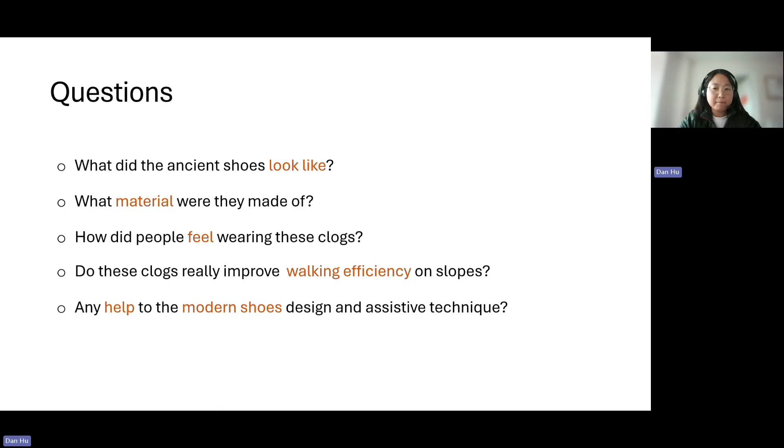Carrying those questions, we designed our research project. We aimed to explore the relevant records of these clogs and reconstruct them. Then we aimed to investigate the physiological and biomechanical effects of wearing Xiegong clogs. Based on those results, we compare the 1-peg and 2-peg Xiegong clogs on uphill and downhill walking. We also want to explore potential applications in shoe design and assistive technology that could enhance walking mobility, safety, and user experience.

So that's how we designed our study. We searched for historic records of clogs dating from AD 385 to AD 433, the period in which Xie Lingyun lived. We found some historic records, then we reconstructed the clogs according to unearthed archaeological finds. Then we used simulation techniques to predict the biomechanical effects on the human body of wearing two different types of clogs.

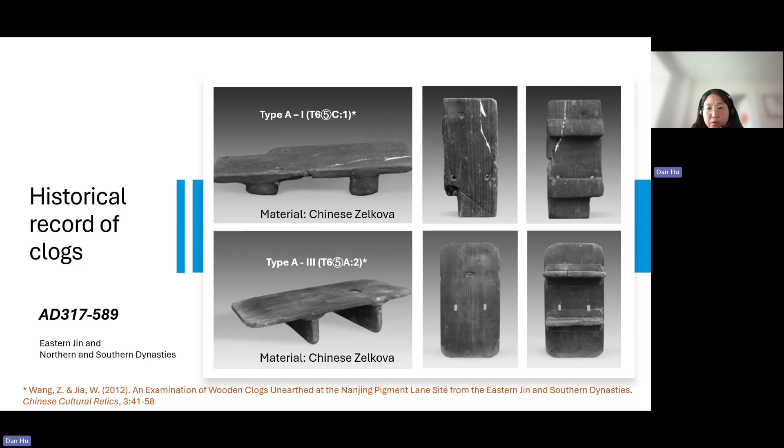If you look at those clogs carefully, you can see there are two pegs under the sole for type A clogs. And there are also 3 holes in the sole. These 3 holes are for the shoelaces or shoe thread to come through and tie the clogs to the foot. Type B clogs are different from type A, as they don't have any pegs. So it's one piece, and you can see there's a hole in the sole for the type B clog.

And for the type B clog, for example, the type BG7 example I chose is also made of Chinese Zelkova wood, the same as type A. But type BG6, the lower one, is made of a different material called Castanopsis wood. This is another type of hardwood, which was commonly seen in southern China, and it has attractive patterns as well. So it was good for making shoes.

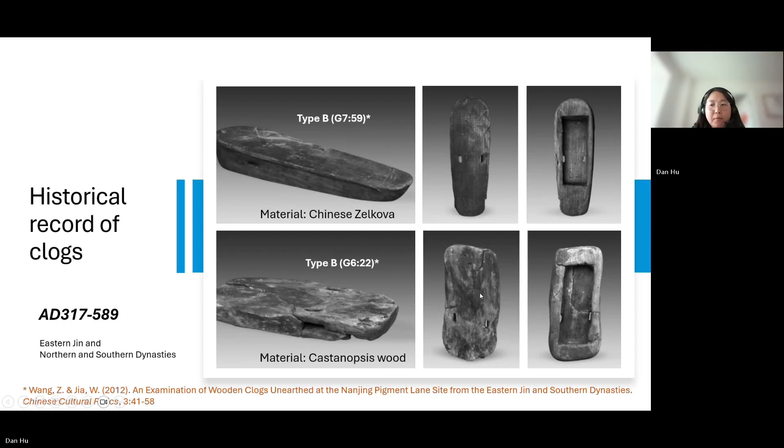You can also see there are 3 holes in those type B clogs, for the shoelaces or thread to come through and tie them to the human's foot. So we selected the type A clogs as our example or benchmark. That is because the type A clogs have 2 pegs, and these pegs are connected to the sole through a so-called tenon joint. So they can be removed if needed.

We found the dimensions of this type A clog from the literature, and we adjusted the size to a US men's size 8 shoe, which I think is equivalent to UK men's size 7. We also did some modification to the clogs. If you see the original unearthed clogs on the left, the distance from the front and back edge to the peg is not symmetric: the front is shorter and the back is longer. But we made them symmetric, so the front edge to the peg equals the back edge to the peg, both 76.

The reason for doing so is we want to create some slope angle when we remove one peg. In this case, the angles will be the same for uphill and downhill, whether we remove the front peg or the back peg. So we manufactured several pairs of these clogs. We used cheap wood. We couldn't afford very high-valued wood like oak, so we only used pine wood. But it worked, although it's not as hard as oak.

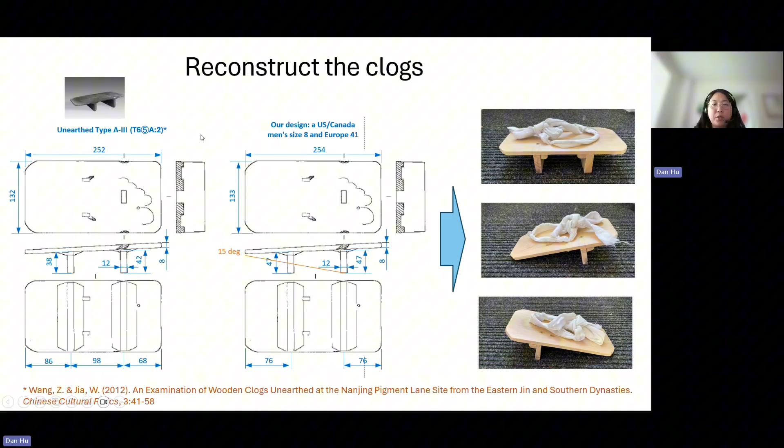Before we conducted any experiment on those clogs, we decided to work on some simulation first. We wanted to know what the simulation results would be like. So we defined a 3-layer optimization framework. This framework can output muscle activations from only 3 inputs: the average walking velocity of the human subject, the stride time, that is the time used to complete one full cycle, and the double stance time, meaning the time when both feet are standing on the ground.

The reason we wanted to conduct the simulation is to first predict by simulation which muscles' function would be influenced by the clogs, in order to find the fundamental reasons that make walking on hills easier. We hoped we could find some solutions from the simulation first.

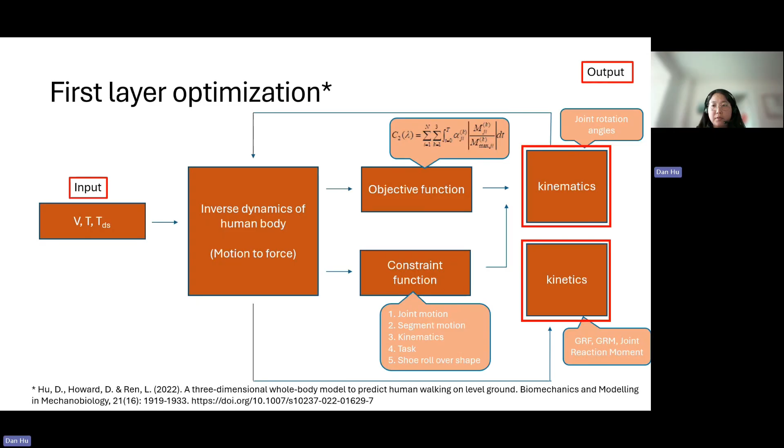Actually, for each joint, there is more than one muscle. The minimum we need is one flexor and one extensor. That means two muscles will be enough to activate a joint. But in reality, we have more muscles. We could have 3, 4, even 5 muscles around one joint. So the remaining muscles, except the flexor and extensor, will be redundant.

So how do we process this kind of redundancy in the human body? Our central nervous system actually knows how to do it. It kind of forces the system to follow the most efficient way. That's why we consider muscle efficiency or minimal energy cost as an optimal criterion for the muscle force distribution around the joint. So it's energy based, or we call it a fatigue based criterion.

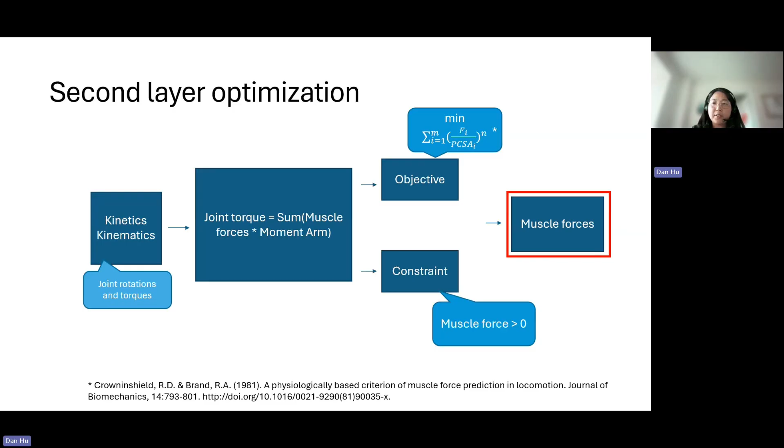So from the second layer optimization, we achieved some muscle forces, and this will be used to predict muscle activations. In theory, we can calculate muscle activations from muscle force straight away based on some muscle models. However, due to the complexity of the muscle models, here we used Hill's model, it has a very complex expression in formulas.

So we decided to use another optimization, to match the muscle forces we predicted from the second layer with the calculated muscle force from Hill's model. Then we can minimize the errors between these two, subject to some constraint like the activation level must be between 0 and 1, so 0 and 100%. In this way, we can predict the muscle activation level A. And this muscle activation can then be validated against the EMG data in the later stage, which is another way to tell whether this simulation works or not.

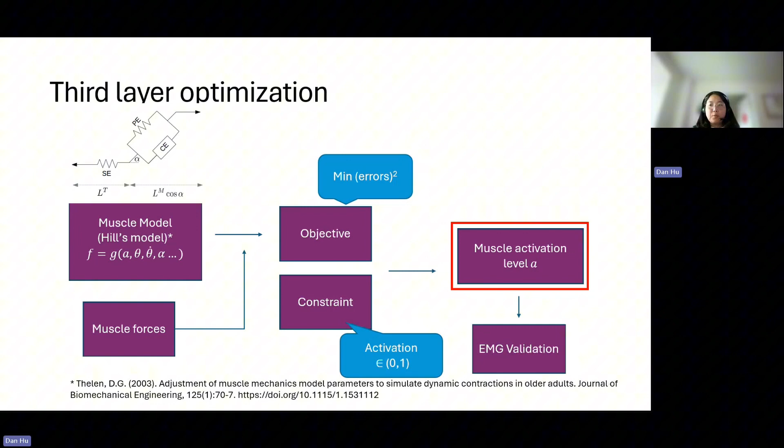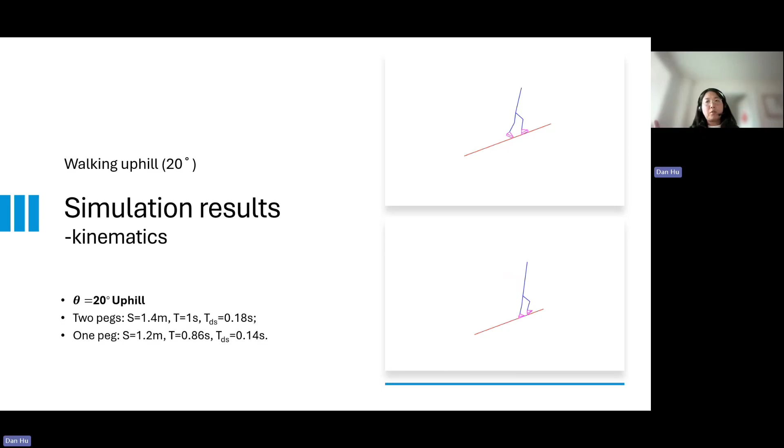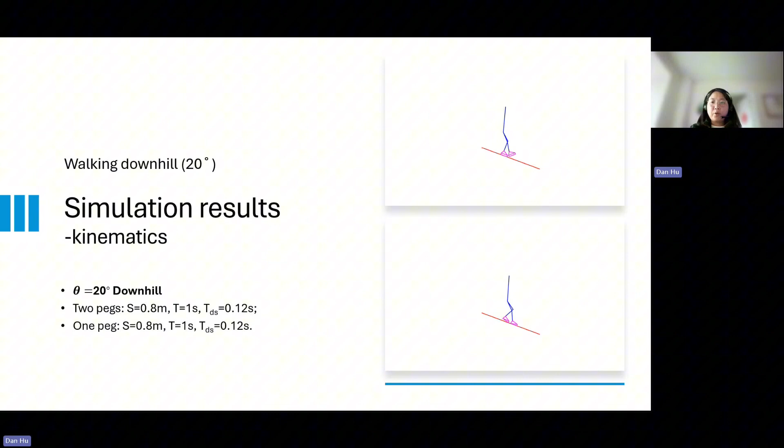pegs walking. For downhill walking, the foot for 2 pegs at stance phase is involving more plantar flexion, if you have seen. So this would further influence the muscles around the ankle joint and probably the muscles around the knee joint as well. So the second layer optimization outputs the muscle forces. So here you can see

I have considered 8 muscles in the optimization framework. These 8 muscles are Gmax, which we call gluteus maximus, at the back of the hip. And IL muscle, I'm not going to tell all the long names, but if you're interested, you can Google all of them. And the hamstring, GAS is gastrocnemius, SOL is soleus, and RF muscle is rectus femoris, VAS muscle, and TA muscle.

So these muscles have their functions. They are providing either flexor or extensor function to each joint. For the hip joint, the Gmax and the HAM provide hip extension, and IL and RF provide the flexor function for the hip. For the knee joint, VAS and RF provide the knee extension function, while the hamstring and GAS act like the

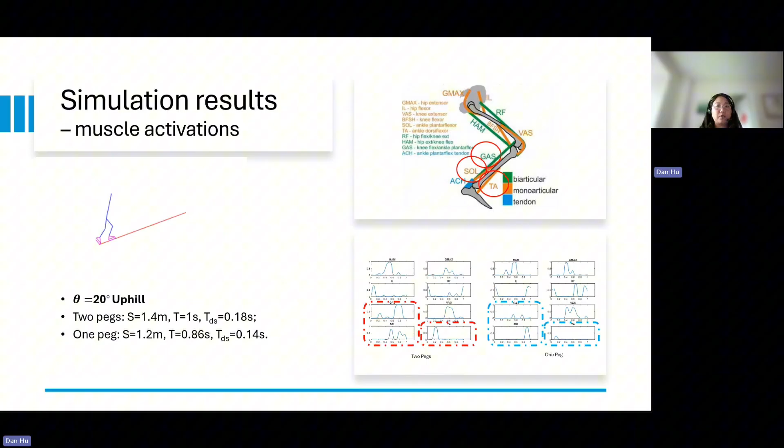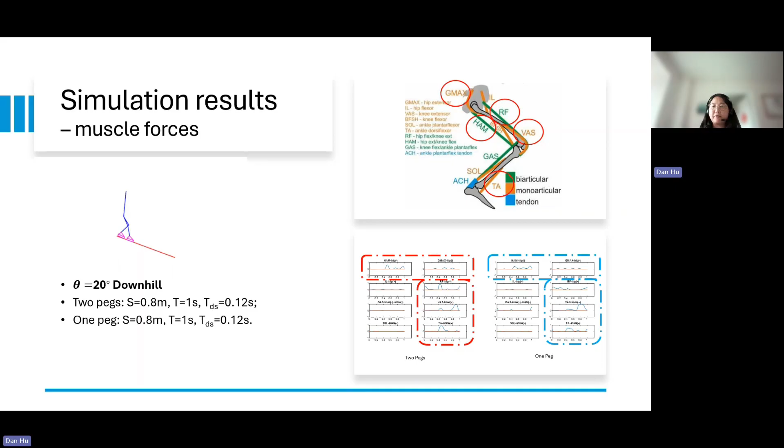knee flexor. For the ankle, SOL and GAS are ankle plantar flexors, sorry, and the TA is a dorsiflexion muscle. So from the results, we can tell that within those 8 muscles, 3 muscles' peaks have been reduced for the one peg walking condition. A similar trend to the muscle forces has been spotted for the muscle activation as well. For downhill walking, within 8 muscles, 5 muscles have been found with reduced peaks for one peg walking, and their activation level as well.

So in summary, the simulation results tell us that for uphill walking, the muscles around the ankle joint, for example soleus, gastrocnemius, and TA muscle, their peaks have been reduced while walking uphill with the one peg clogs compared to 2 pegs. For downhill walking, muscles around the knee joint and the ankle joint, like hamstring, RF, VAS, Gmax, TA muscles, their peaks have been reduced while walking with one peg clogs compared to 2 pegs clogs.

To validate those simulation results, we designed some experiments, and thanks to the Center for Physical Activity, Sport and Exercise Science, PASES, from Coventry University, we were able to use their facilities. And this experiment has been approved by the ethics committee of Coventry University, and all the participants gave informed

consent before participating. We recruited 8 healthy subjects, 6 male and 2 female, age 33 plus and minus 8 years, mass 76 plus minus 10.5 kg, and height 172 plus minus 9.8 centimeters. So the experiment conditions are mainly a comparison between one peg vs 2 pegs walking on different slopes. The slope range covered from downhill 25% to uphill 20%. We selected 3 km per hour for uphill walking and 2.5 km per hour for downhill walking as the walking speed. And each subject walked for 5 minutes for each trial.

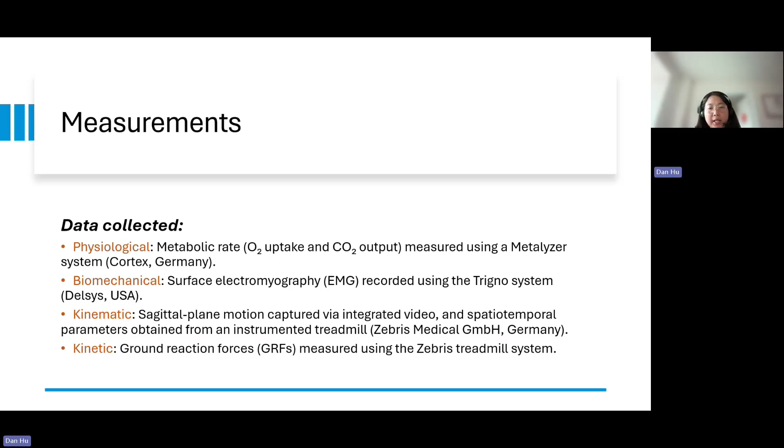So here are some results. The metabolic cost shows that there's some difference between one peg and two peg walking. We can see, in general, uphill walking consumes more energy than downhill walking, which makes sense. For steep slope angles, such as 20% for uphill walking and 25% for downhill walking, we notice the one peg, which is the deeper color, metabolic rate is lower than the two peg metabolic rate. And this is consistent between uphill and downhill.

For downhill walking, all the conditions show that one peg is consuming less energy. But for uphill, this advantage of the one peg was not very obvious for moderate slope angles. Even for the 10% slope angle, we notice the two peg seems to use less energy than the one peg. We reckon it's possibly because the shoe angle is around 15 degrees, which is higher than the slope angles, and probably this contributes to the energy difference for very low slope angle walking.

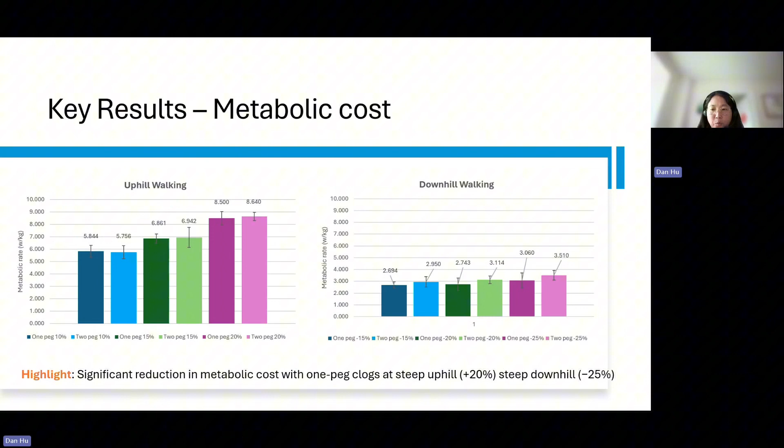This is the EMG data results. We collected the EMG data for all 8 muscles in the lower limb to match with the simulation. We found for uphill walking, those 4 muscle forces have been reduced for one peg walking. And from the figures you can see, soleus, GAS, TA and Gmax muscles, their peaks are increasing with the increment of the slope angle. So this is 10%, then increasing to 15%, 20%.

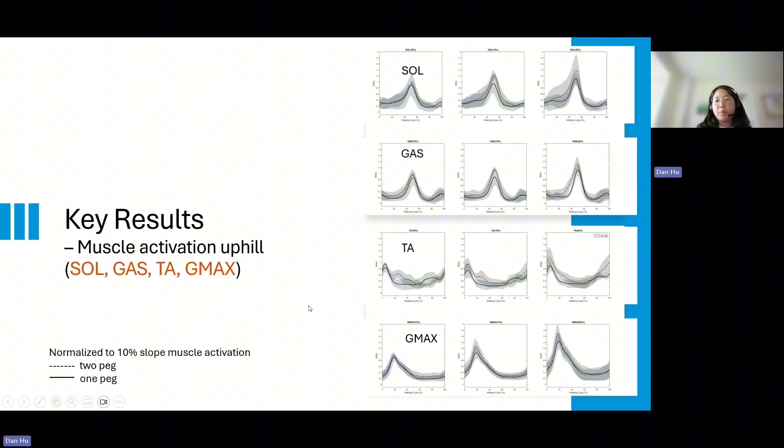So this makes sense. And for the peak, you can see the solid line is for one peg clogs walking, and the dashed line is for the two pegs. So we can see that the solid line peak is lower than the dashed line peak, which means the one peg clogs walking is actually reducing the maximum muscle activation through the time history.

If we compare the simulation results and the experiment results, we find some similarity and some difference. In the simulation for uphill walking, three muscles show the same trend as one peg: peaks have been reduced, but one muscle force was not picked up by the simulation, that is Gmax. For downhill walking, we noticed the simulation seems to predict more muscles than the experiment whose peaks have been reduced for one peg.

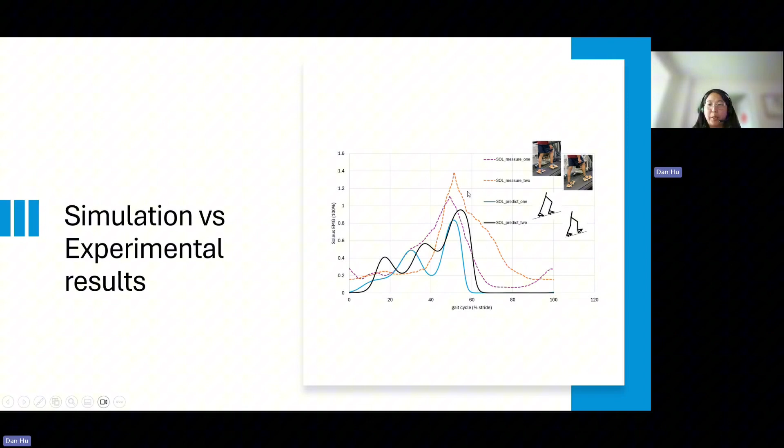We also compared the simulation activation results with the experiment EMG activation data. Here we used soleus as an example to show whether they match. We find that in general, the trend is matching. That means in the time history, it seems to show similar peak timing positions. And most importantly, we find the one peg soleus activation level is reduced compared to two peg. And this has been shown in both experiments and simulation results.

So after achieving so many results, we can say that the one-peg clogs design can enhance neuromuscular efficiency by improving coordination and reducing muscular contraction on both uphill and downhill. They can also improve energy economy by lowering the metabolic cost during slope locomotion.

The reason behind this may be the altered foot-ground interaction affecting contact mechanics and plantar pressure distribution. And this likely redistributed mechanical load across the lower limb, which may influence the joint movements and muscle activation patterns.

These research findings support the historic claims regarding the functional value of the design. They also show that the ancient design can be functionally optimized. So that means maybe the people many years ago in the Northern and Southern Dynasties probably considered designing clogs and tried to make the best design, or as good a design as possible. So we can see behind those clogs designs, there is some evidence that supports this.

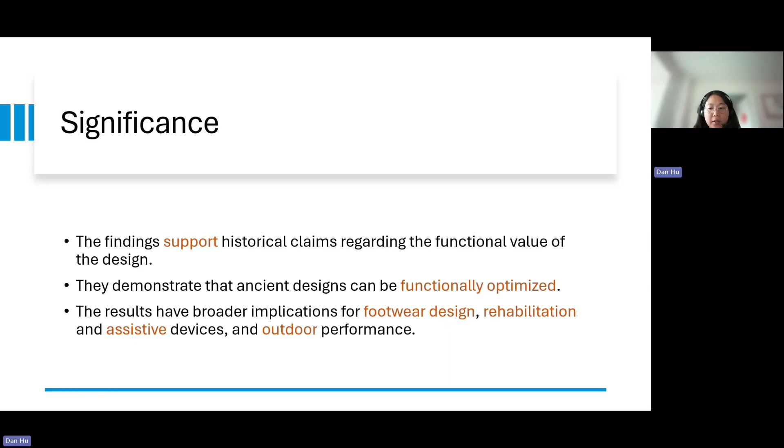The results have also brought some implications that it can be used for footwear design, rehabilitation, assistive devices, and probably for some outdoor performance benefit as well. So we did explore some potential applications of the Xiegong clogs in modern shoe designs. We reckon it would be too complex to design a brand new shoe. So designing an outsole for a shoe is a good idea.

So the students actually had a trial wearing them and walking on some slope. And they said it felt all right. Well, we couldn't collect any experimental data due to ethics approval issues. So we can only do try and fit.

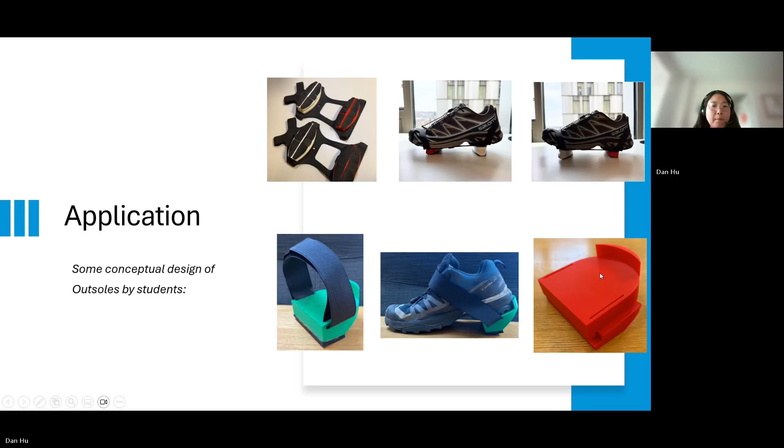Of course, this research has some limitations. It's limited by a small sample size. We only had 8 subjects, and it's based on short-term testing conditions. We did not assess whether equivalent one-peg trainers would be more efficient than conventional trainers. So in the future, we would want to investigate a larger sample and the long-term adaptation effects. We would want to continue to work on the application of the Xiegong clogs to modern footwear design.

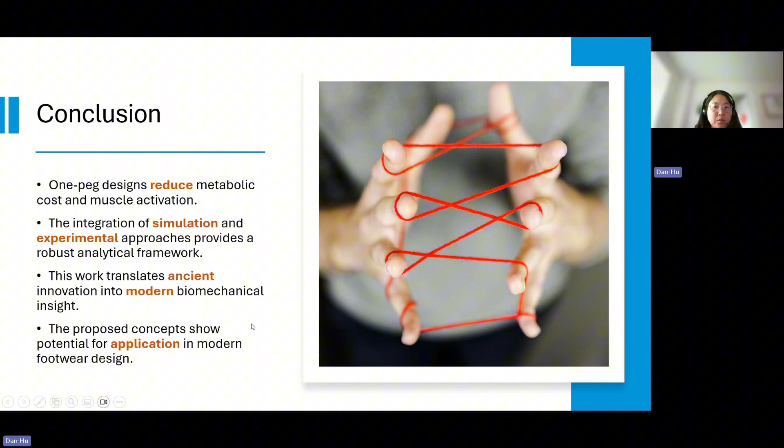In conclusion, this study tells us that one-peg designs can reduce metabolic cost and muscle activation. And we find that the integration of simulation and experimental approaches provides a robust analytical framework. And this work has translated ancient innovation into modern biomechanical insight. We proposed some design concepts that show there is potential application of the Xiegong clogs in modern footwear design.